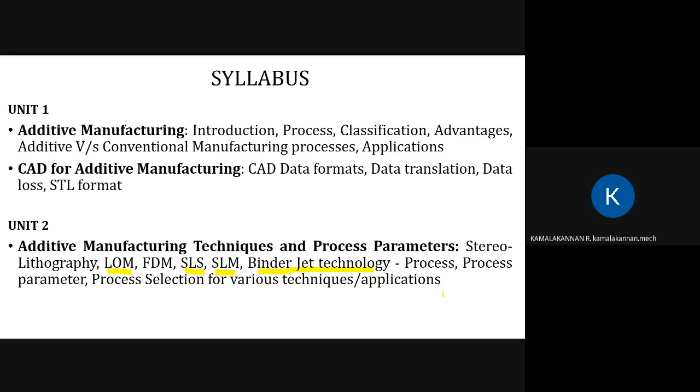So the third unit is nothing but materials - what materials we have to use in the 3D printer. There are a lot of materials available, so how do we have to choose, and why have you chosen that, and because of that what is your output? So that is what we are going to see. But here they have additionally given a topic called powder preparation and their desired properties.

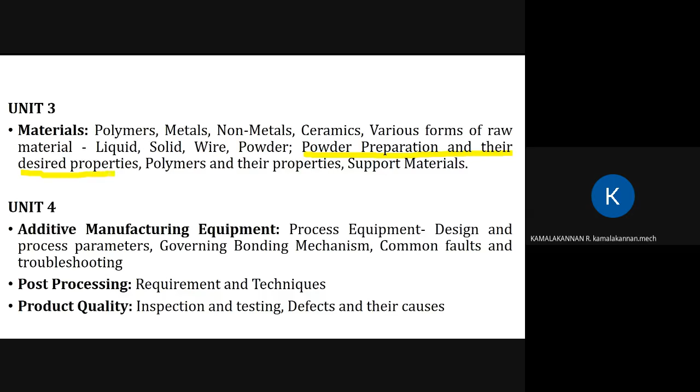Powder preparation. I have verified that I have checked many books. I have not got this data about powder preparation and their desired properties. And finally, after searching for a long time on the net, I have found data for this.

There are 7 types of powder preparation available in 3D printers that we will see once we have completed general materials: polymers, metals, non-metals, ceramics. Once we have seen this, we'll go for powder preparation. That is what this unit 3 will be. This unit 3 we have to complete in 9 hours.

Why I am indicating this is, when you talk about materials, there are a lot of things we can talk about. We cannot complete it in 9 hours, or else we can complete exactly in the hours given. There are 2 things I can do. But what I'm going to do is give you enough data as examples, because polymers, metals, non-metals, ceramics you have already studied in material science. So I'm going to talk about what this material exactly does, or is needed for, in 3D printers. So please listen carefully, that is the data I'm going to give you.

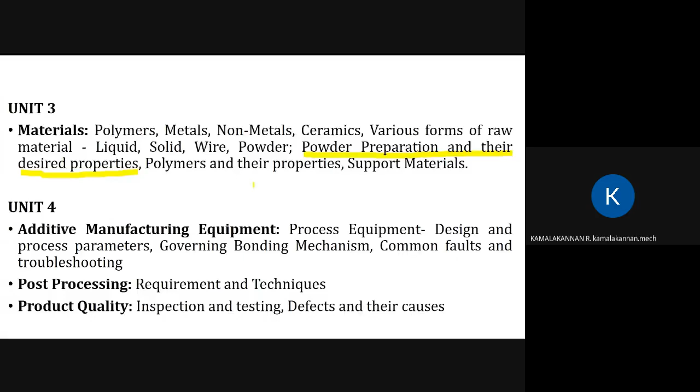After that we will see powder preparation. So that is what unit 3 is. It is easy to complete and easy to understand also. Okay guys.

Guys, shall we start our unit 3, man? Are you there? Okay. Yes sir, so in this unit 3 we have completed up to

ABS. We have completed that. Let it be, I'll go again from this slide itself. In 3D printing we have almost all types of material we can use.

Any type of material we can use. The thing is, whether that material, what type of material you are choosing, is suitable for which technology you have to choose. For that material, which technology is suitable, that is what you are going to choose properly. Then it will be converted into a product easily. Choose a product and choose the technology properly, and the final product will be whatever you want.

But it also depends upon the material - the quality of the product will depend on it, because when you choose plastic, the output will be like that. When you choose metal, the output will be like that. So depending upon the material, your output will be; depending upon the material, the character of the product will be. So choose accordingly.

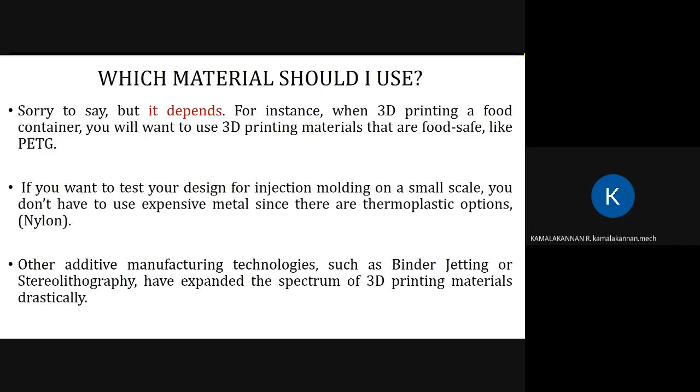We have used resin also. There are 7 types of resins. Some resins, when you wash with water, will get dissolved. So there are different types of resin you can choose, depends upon your usage. Which material you should use depends upon the output what you need. According to that, we can choose.

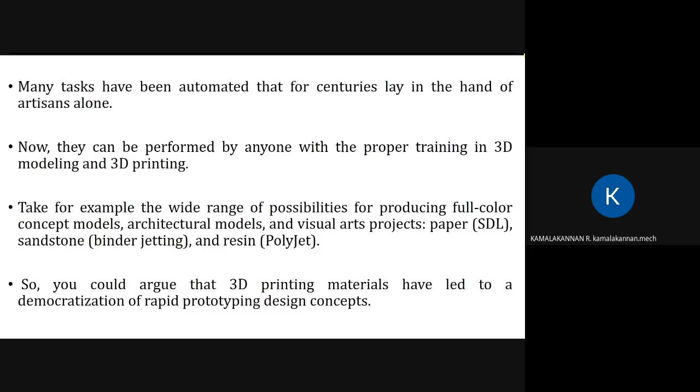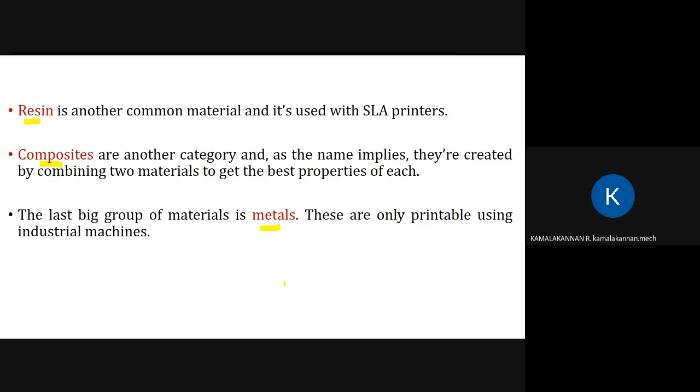We cannot go for a specific one material all the time. So generally in this unit we will study about plastic, that is nothing but polymers, and then we'll go for resin, composites, metals. That is what we are going to see in this unit. So let us go for polymers.

In polymers there are many types, as you know, ABS, PLA, nylon, PEEK, PETG, Ultem, HIPS, PVA. These are the polymers used in 3D printing, because these polymers' characteristics are suitable for the 3D printing machine and their output. That is why we have used this polymers alone.

First we will see ABS. ABS is nothing but acrylonitrile butadiene styrene. This is one of the popular plastics. We can see this in our daily usage, or in home appliances, keyboard caps, toys, canoes, medical devices, even flat screen TVs and computer monitors. These are the things easily using ABS.

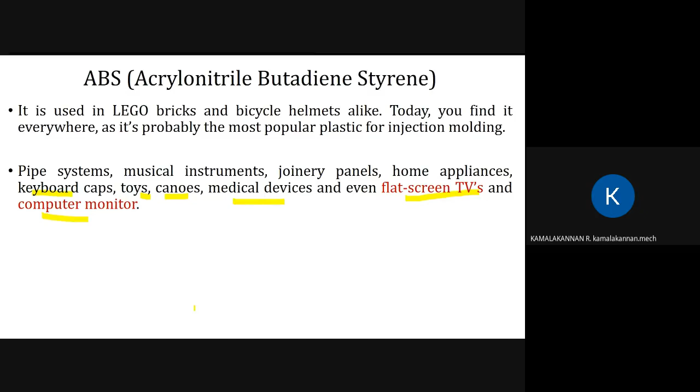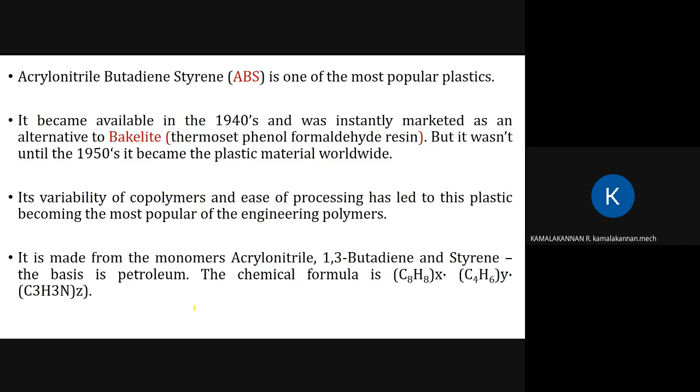It is tougher, also less costly, that is why we are using ABS. It has some extreme properties. Earlier they have used Bakelite, instead of that it came and became suddenly preferred for its cost and its strength. That is why till now ABS is used, and it has some chemical formula too.

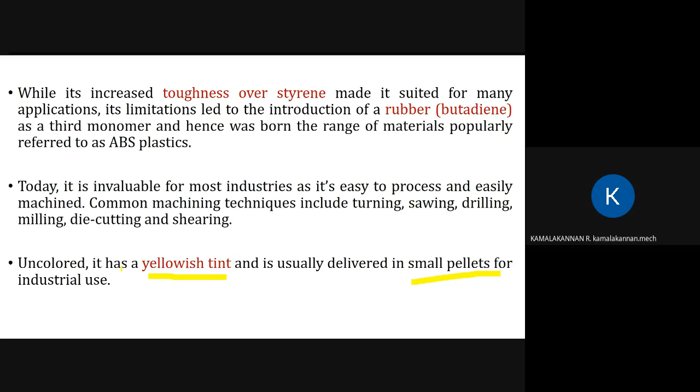What we have seen in the lab is white in color, and that is not exactly what it was, milk white in color. This one is yellowish in color.

So why are we choosing this ABS filament? What are its specific benefits? It can melt and cool without altering its chemical properties. That is why we have chosen this ABS. It can able to melt, and once it gets solidified, its chemical property doesn't change.

Because of its popularity, there is a company called Zortrax which made a 3D printing machine specifically for ABS filament alone. That is how popular ABS is. You can simply say that about 40 to 50 percentage of products made by 3D printers use this ABS filament.

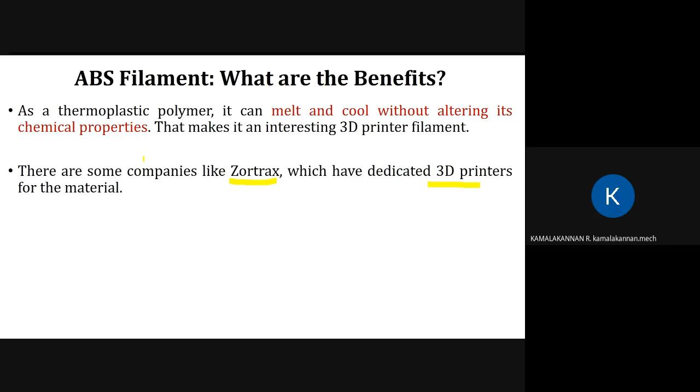Because of its good mechanical properties, it is strong, tough and durable. It is able to give scratch resistance, good resistance to heat. Good resistance to heat means it cannot continuously resist heat. When you place this in sunlight, it will start to degrade. But for a few times it can able to resist heat. It cannot resist it every day, that is the thing you have to note down.

It can even be used in some wear and tear areas. It can withstand a few times compared to other types of plastics. Here they have compared ABS with PLA. PLA breaks more easily compared to ABS. So what they are saying here is ABS is better than PLA. Why we compare with PLA is that PLA is a material we can find as an alternative for ABS, so comparing them, PLA breaks easily, but compared to ABS, that is what they are saying here.

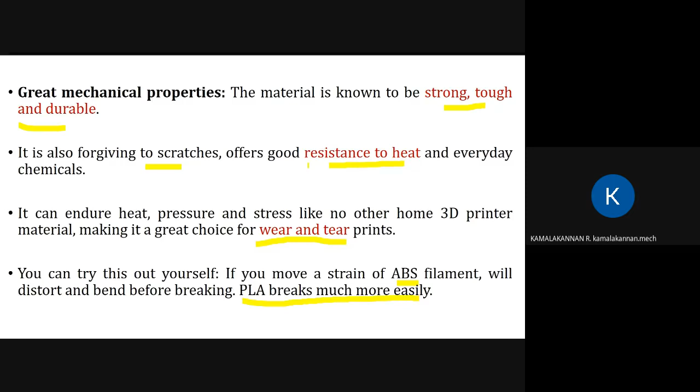Let us see about PLA in a few slides later, then you will find the difference. As I said, about 40 to 50 percentage of material used in 3D printing is ABS, and similarly 30 to 40 percentage is PLA. So ABS and PLA both are competitive in usage of 3D printer.

It has good results, meaning overhanging up to about 45 degree. We might have a product with some angles, where we have to give some supports. But when you use ABS up to 45 degree, you don't need any support. It can able to withstand, but for some other material you have to give extra support.

When you give a support, there will be more usage of material, so usage of material is reduced here. So it is one good sign for you to use ABS material.

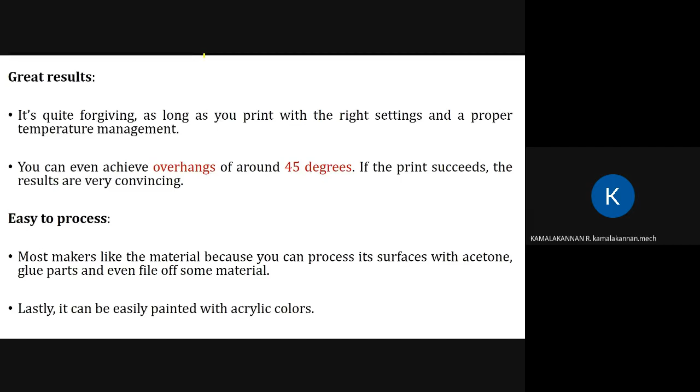Also it has some drawbacks. What drawback is temperature issue. As I told you earlier, they offer good resistance to heat, but for few times after that it cannot able to withstand. I have told you in the earlier slide that this material is able to melt, and once it gets solidified, chemical property doesn't change.

But one thing you have to note down here, this material has to solidify slowly. Once it gets solidified faster, it will degrade very fast. So you have to keep in mind that you have to make this material cool down slowly, so that you will get a good benefit out of it.

How you can solidify this slowly is, you have to use a closed 3D printer for making this material. You have already seen that there might be some 3D printers with opening condition, and there will be a printer with closed condition. You have to choose closed condition.

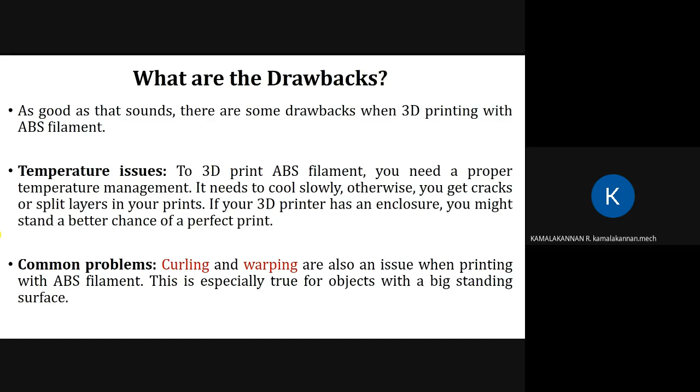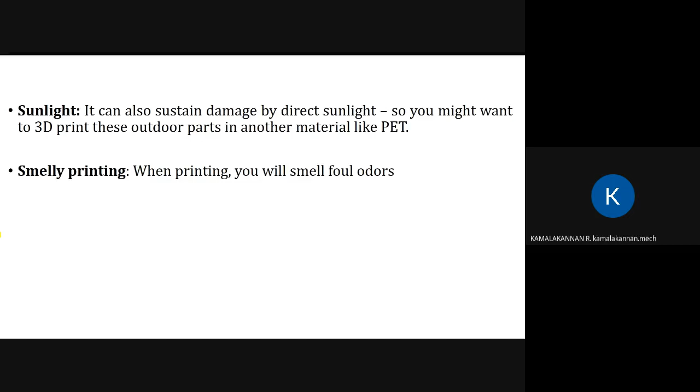So what are the alternatives? Here they have mentioned many alternates. PLA is a good alternate, PET and PETG they have given here too, but the best what I feel is the best alternative is PLA, because both have similar characteristics. Let us see, while studying about PLA, you will be able to understand.

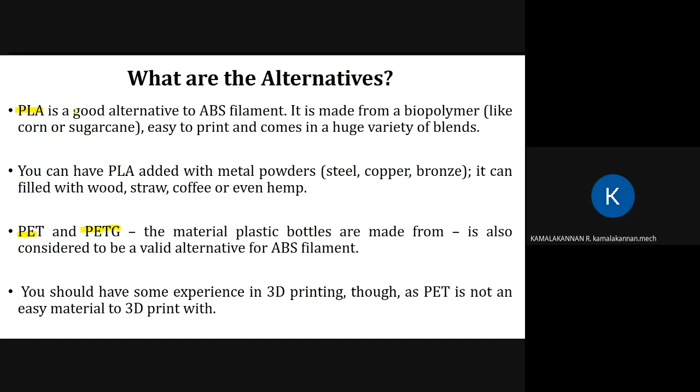PET and PETG both are plastics. Both we will see in further slides.

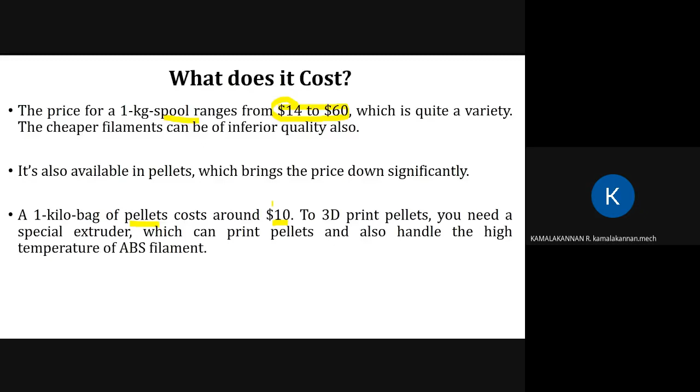This is about proper setting, how you have to set your 3D printer while using ABS. Close the printer, you have to use the closed condition printer. Use a heated bed, always you will heat the bed and start your work. And it is kept on a blue glass build plate.

Plate to cover is a general thing. When you have Kapton blue, it is nothing but what we use in our car for avoiding sunlight, yes or no? It will be available in the form of blue, black, gray. Many colors are there.

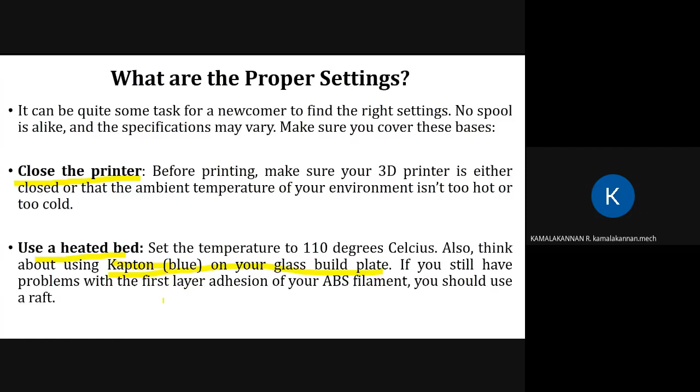It is one time. Kapton blue is a sheet which you have to stick on the glass to avoid the sunlight. It will reduce the solidification rate, so you have to use Kapton blue on your glass build plate.

Experimental temperature is plus or minus 230 degrees Celsius. Sometimes it will differ by plus or minus 5 degrees Celsius from that. You have to choose accordingly.

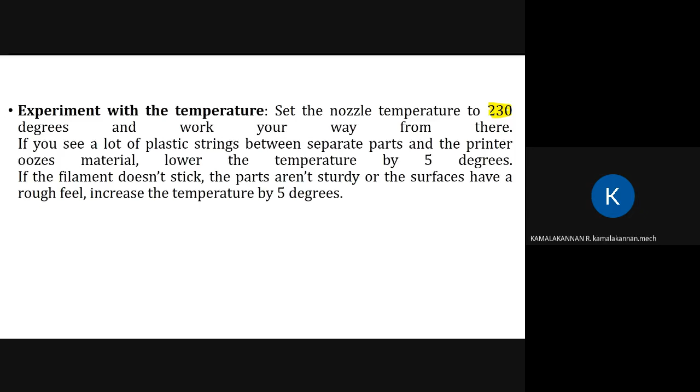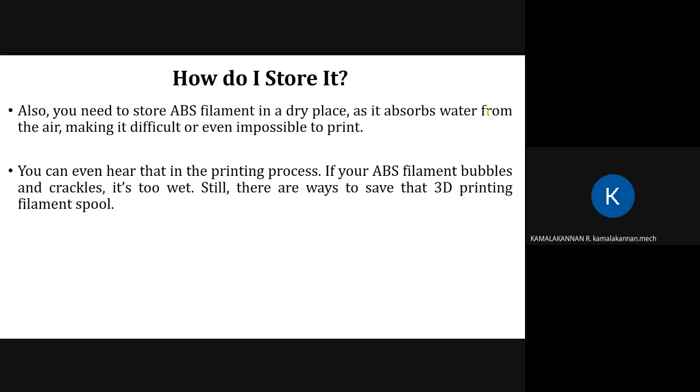How do you store it? As this material degrades in sunlight, you have to place it in a proper container and avoid sunlight. Also, if that ABS is in some moisture condition while the 3D printer prints, there will be some crackle sound. So to avoid that, you have to place it in a dry condition.

Where it can be used: FDM, binder jetting, SLA, polyjet. These are the types of technologies you can use with this material, using this ABS. Specific properties: strong, light, high resolution, somewhat flexible. Applications: architectural models, concept models, DIY do-it-yourself projects, manufacturing. These are some applications.

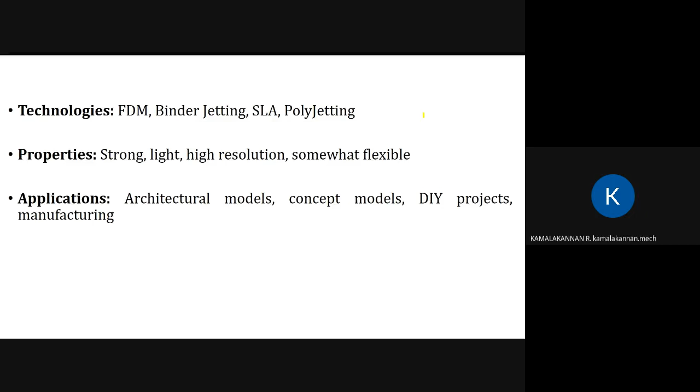Next one is PLA. The best alternative for ABS is PLA. As I have told you, PLA is nothing but polylactic acid. This polylactic acid has a good fragrance while heating.

Good fragrance while heating. When you compare it with ABS, ABS will give some foul odor, but PLA will give good fragrance while heating. It's a good one while printing. When you're nearby, you will have some good smell. That is good for us, you know.

For this alone, many prefer PLA, because both are similar in character. Because of this reason, some prefer PLA compared to ABS. When you compare PLA and ABS, which one is more durable? ABS is more durable than PLA. That is why ABS wins over PLA in a few areas.

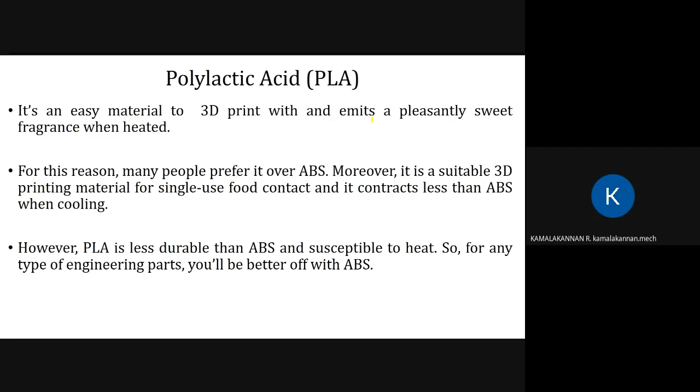Okay, while storing, ABS has to be stored in a closed container and placed in a dark room. This is good for it, because sunlight will degrade it.

But PLA has to be placed in a closed container, because humidity will affect it. Okay, next one is nylon.

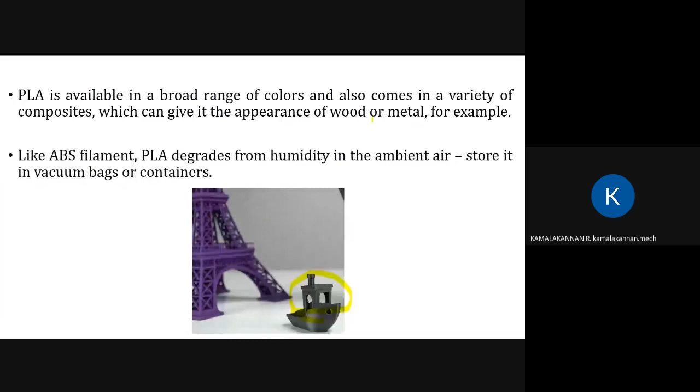Nylon is simply white plastic. Nylon is mostly used in home appliances and even industries. It is an easily available material, it is stronger, and its character is ideally suitable for 3D printing. It has good tensile and mechanical strength, which is what we expect in a 3D printer. That is why nylon is also highly used in 3D printing machines.

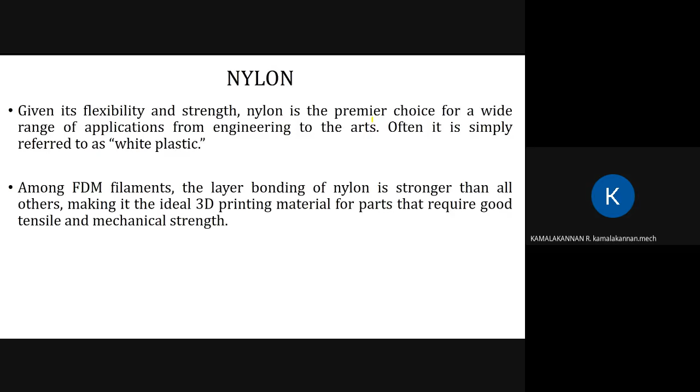Depending upon its strength, you will get the surface finish. When a material is mechanically strong, it always has a rough surface finish. When you have a mechanically less strong material, it will have a smooth surface finish. That is the difference. So when you use mechanically strong material in a 3D printer, you have to go for post-processing. When you take resin, it doesn't need any post-processing, but nylon needs post-processing. That is the difference, guys.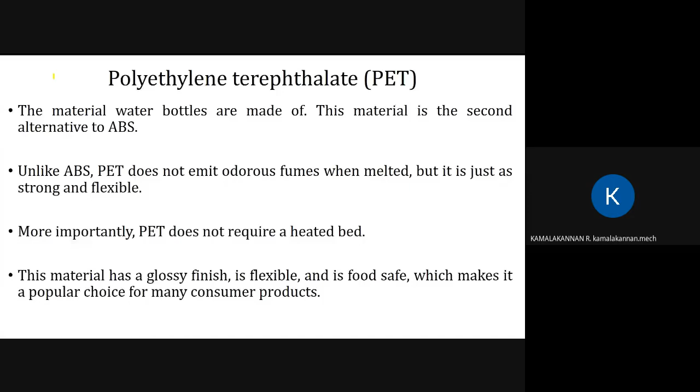Boys, it is 11:56, do you have any doubt up to now? Boys, do you have any doubt, man? Do you have to repeat anything? Tell me, boys, or else I will continue. No, complete sir, no sir. Boys, is my voice audible for everyone? Yes, sir, audible, sir, yes sir. Okay then, shall I complete PET today itself, man? Is that okay? Boys, tell me, boys.

Okay, let it be, tomorrow I will complete this PET. PET is similar to nylon, let us see about it tomorrow.

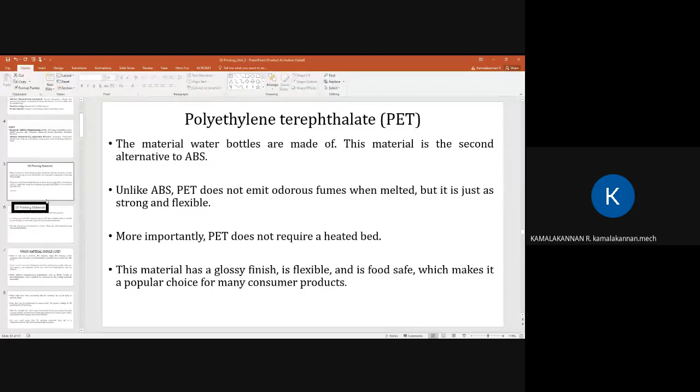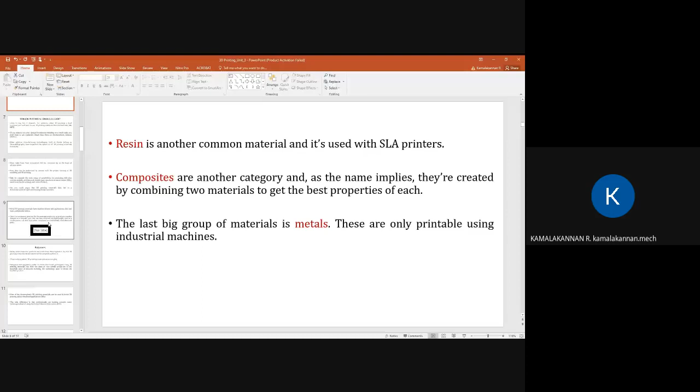So what we have seen today is an introduction about our syllabus, as we are having a meeting after a very long time. We have seen what syllabus we have completed, and we started unit 3 today, 3D printing materials. There are many types of materials we can use here, from plastics, metals, non-metals, resin, and composites. Today we have seen plastics. This plastic again classifies into many types, but a few plastics are suitable for use in 3D printing because of its technology. We are seeing those plastics one by one. So we have seen about ABS, PLA, and nylon. These three we have seen in today's class. From tomorrow onwards, we will see the remaining ones.